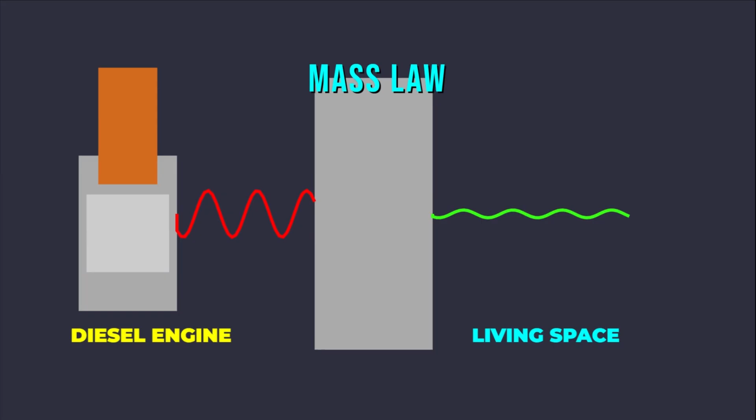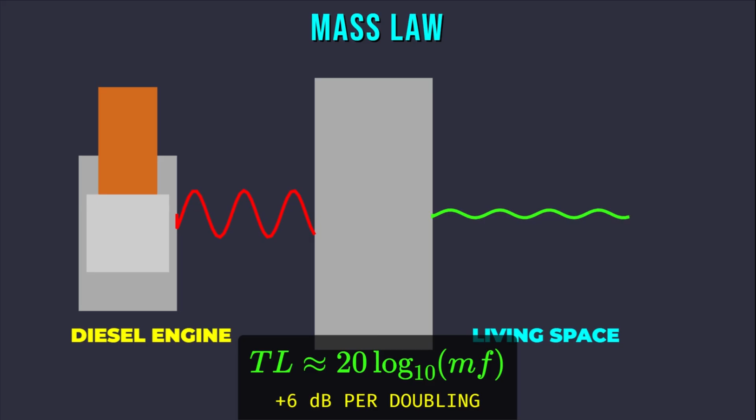A solid concrete slab half a meter thick still allows the deep vibration of a diesel engine to penetrate into a living space. This phenomenon occurs because mass alone follows a logarithmic law of diminishing returns, where doubling the weight of a partition only yields a 6 decibel increase in sound isolation.

In structural acoustics, this is known as the mass law, which dictates that the transmission loss of a single-leaf partition is primarily a function of its surface density and the frequency of the sound. For a home builder, relying solely on heavy materials becomes structurally and economically unfeasible when seeking high levels of quiet.

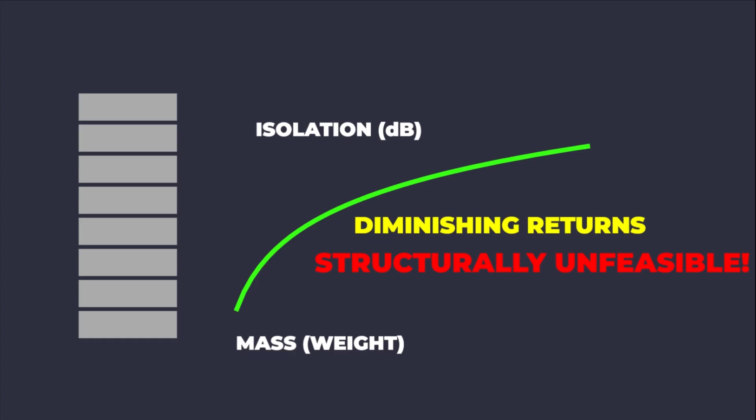Sound energy moves through solid materials as mechanical vibration, traveling at speeds significantly higher than through air. To achieve superior isolation without excessive weight, engineers must look beyond simple density and begin manipulating the mechanical path through which vibration travels. Every rigid material has a specific critical frequency where the speed of its internal bending waves matches the speed of sound waves in the surrounding air.

At this precise point, the material becomes acoustically transparent, allowing sound to pass through with minimal resistance. This is the coincidence effect, and it creates a significant dip in the sound transmission class of a wall. For standard half-inch gypsum board, this critical frequency typically falls in the upper mid-range, which is highly audible to the human ear.

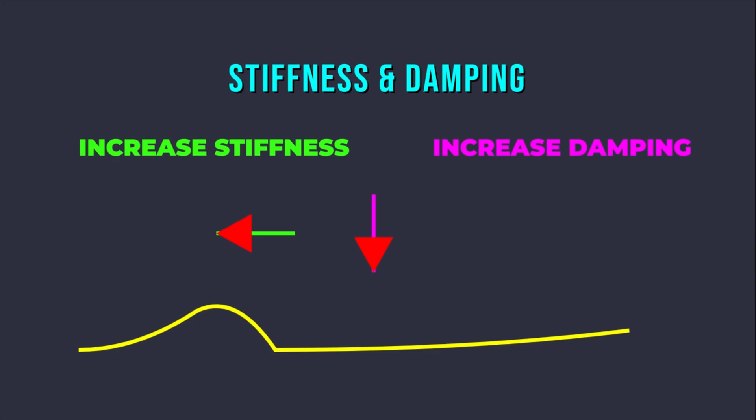Engineers mitigate this by either increasing the stiffness of the material to push the coincidence frequency below the audible range or increasing the damping to flatten the resonance peak. Understanding the relationship between bending stiffness and surface mass allows for the selection of materials that do not exhibit these weaknesses in the frequencies most common to residential noise, like speech or mechanical systems.

In standard light frame construction, studs act as mechanical bridges that transmit vibration directly from one side of the wall to the other. When sound waves hit one face of the drywall, the energy is transferred through the screws into the wood or steel stud and immediately out through the opposite face. This direct connection bypasses any insulation inside the wall cavity, rendering the internal airspace largely ineffective for sound isolation.

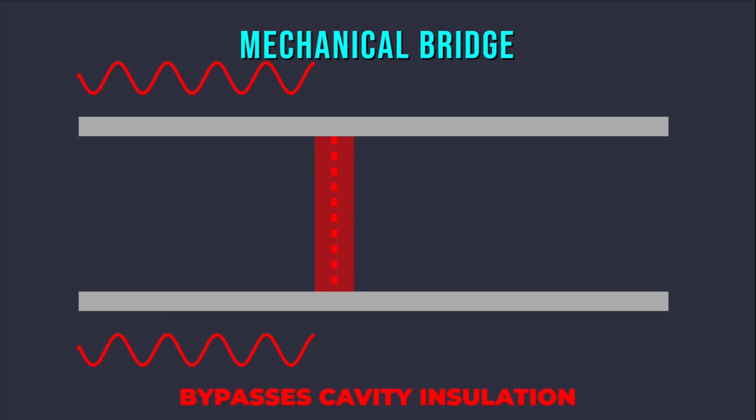Mechanical bridging explains why a wall with high thermal insulation can still perform poorly in acoustic tests. To break this bridge, the two faces of the wall must be physically separated so they can vibrate independently of one another. This separation is the foundation of decoupling, a strategy that shifts the engineering focus from blocking sound with mass to interrupting the transmission of kinetic energy through the structural skeleton of the building.

Staggered stud construction utilizes a wider floor plate than the individual studs to create two independent rows of vertical members. Each row supports only one side of the wall, ensuring that no single stud touches both the interior and exterior wall skins. This design breaks the direct mechanical bridge found in standard framing while maintaining a single wall footprint.

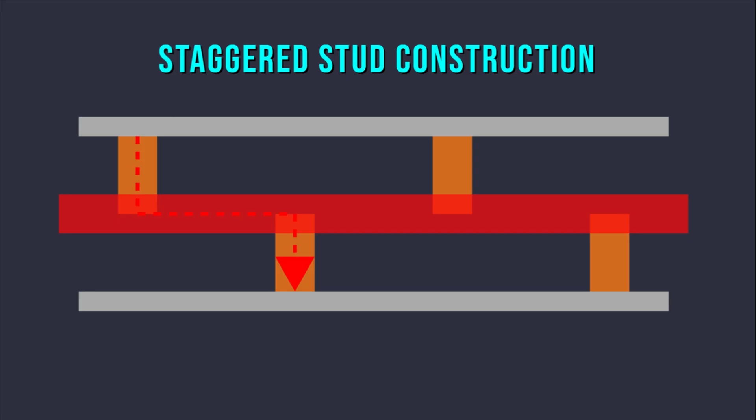While effective at reducing the transmission of high-frequency sounds, staggered stud walls are still limited by their shared top and bottom plates. Since both sets of studs are rigidly attached to the same horizontal members, low-frequency vibrations can still travel through the plates in a phenomenon known as plate flanking. Despite this limitation, staggered studs provide a significant increase in sound transmission class compared to standard framing without requiring the additional square footage of a full double stud wall system.

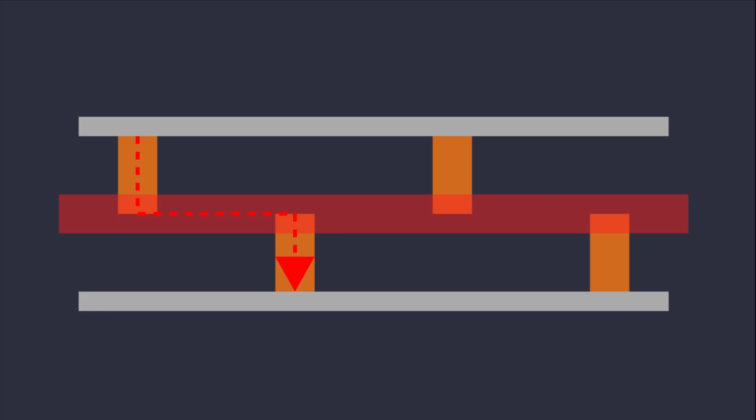The most effective method for structural decoupling is the double stud wall, which consists of two entirely separate framing systems separated by an air gap of at least 25 millimeters. By eliminating shared top and bottom plates, the double stud design provides nearly complete mechanical isolation between the two wall faces.

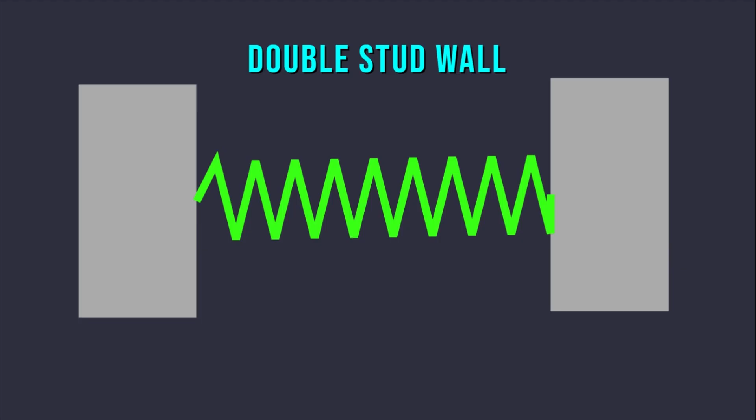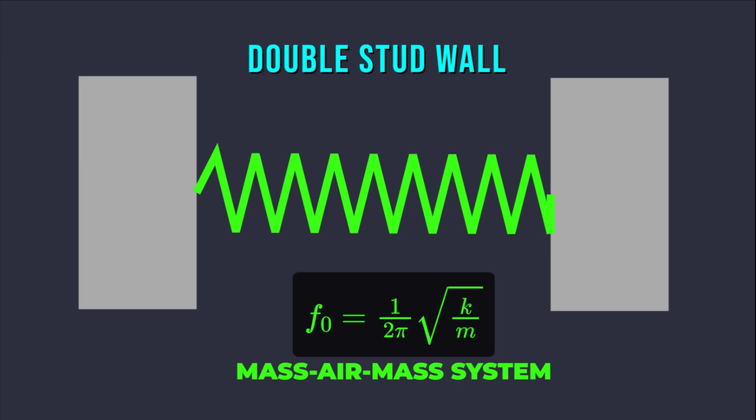This configuration creates a mass-air-mass system where the air in the cavity acts as a soft spring between two heavy masses. The depth of the cavity directly influences the resonant frequency of the system, with larger gaps providing better isolation for low-frequency sounds, like the bass from a home theater or heavy machinery.

Filling the cavity with open-cell insulation, like mineral wool, does not block sound directly, but instead provides acoustic damping by converting the movement of air molecules into heat through friction within the fiber matrix. An isolated wall functions as a mechanical oscillator, where the two layers of drywall represent the masses and the air trapped between them represents the spring.

The resonant frequency of this system is a critical design parameter because the wall actually loses isolation performance at its own natural frequency. If the resonance occurs at 60 Hz, the wall will vibrate sympathetically with low-frequency noise, potentially performing worse than a single layer of material.

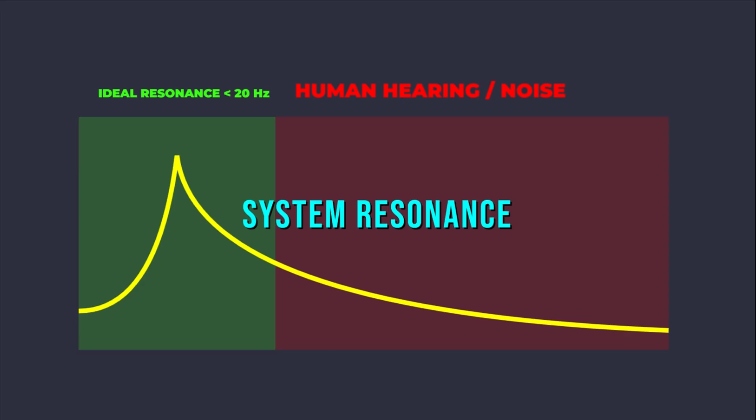To prevent this, engineers maximize the air cavity depth and the mass of the wall leaves to push the resonant frequency as low as possible, ideally below 20 Hz. This keeps the resonant peak outside the range of human hearing and typical building noise.

Precise calculation of this frequency is essential for infrastructure near rail lines or airports, where low-frequency energy is the primary acoustic challenge in civil engineering projects.

When space constraints prevent the use of double-stud walls, resilient sound isolation clips offer a high-performance alternative for decoupling. These devices consist of a rubber isolator mounted to the stud, which holds a metal hat channel in place. The drywall is then attached only to the channel, never directly to the studs.

The rubber element acts as a shock absorber, significantly reducing the amount of vibrational energy that can pass into the structure. Unlike older technologies such as resilient channels, which are easily short-circuited by long screws hitting the studs, clips are more robust and less prone to installation errors.

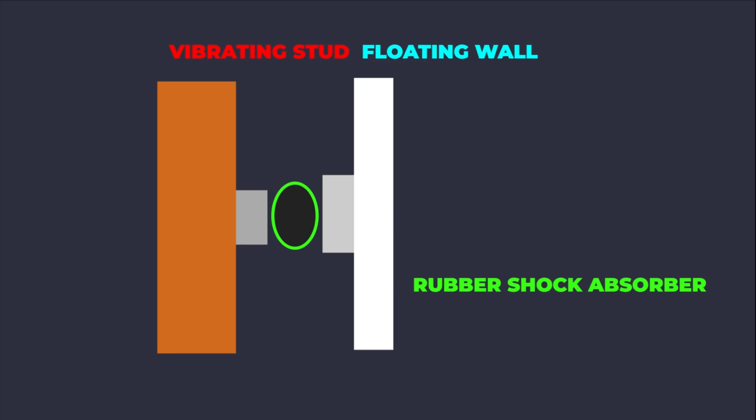By creating a floating wall surface, these clips allow for high sound transmission class ratings in high-rise developments and multifamily housing, where floor space is at a premium and structural integrity must be maintained through rigid framing.

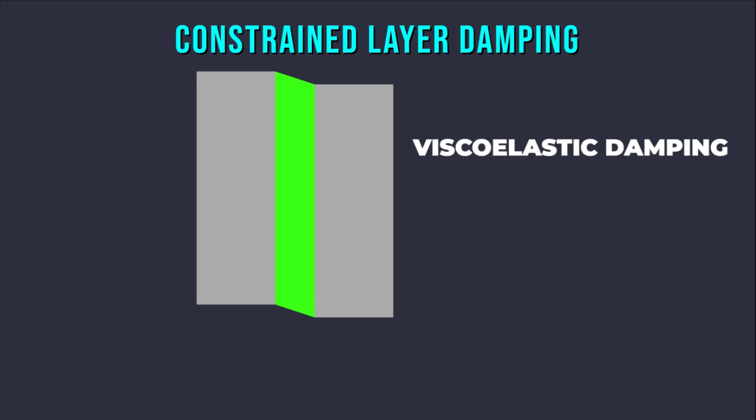Damping is the process of extracting energy from a vibrating system to stop it from ringing. In modern wall construction, this is achieved using viscoelastic damping compounds applied between two layers of rigid gypsum board. When sound waves cause the wall to flex, the damping layer is subjected to shear forces. Because the material is viscoelastic, it resists the shear and converts the mechanical energy into a negligible amount of heat.

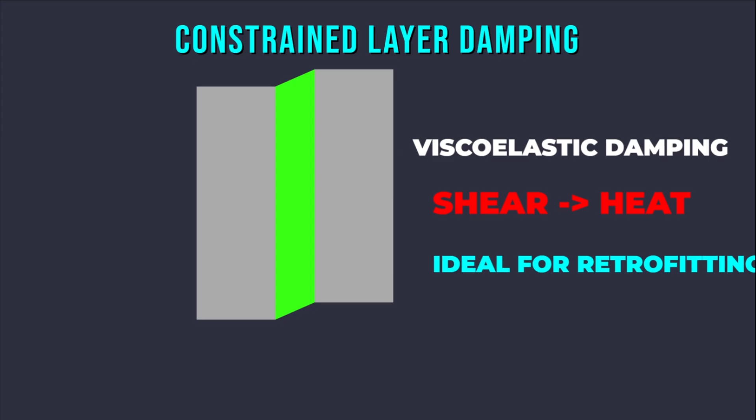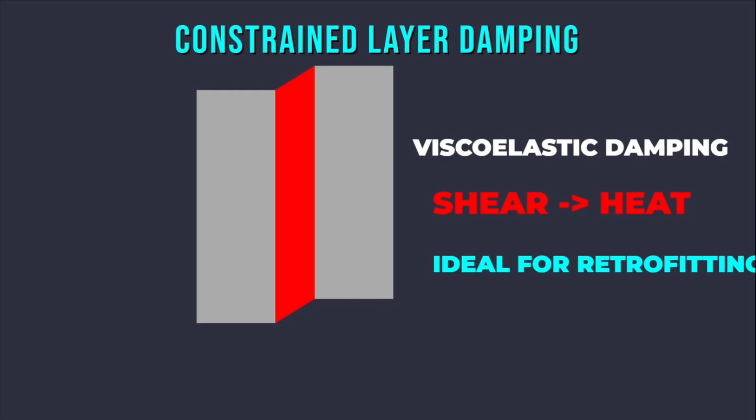This process is known as constrained layer damping. It effectively reduces the amplitude of the coincidence dip and lowers the overall vibration of the wall leaf. Using a damping compound allows a partition to achieve the acoustic performance of much thicker or heavier materials. This technology is particularly useful for retrofitting existing structures where the framing cannot be altered, but improved sound isolation is required for office privacy or media rooms.

A common mistake in acoustic design is the creation of a triple leaf system, which occurs when a third layer of mass is placed inside a cavity between two existing walls. Physics dictates that two air cavities are worse than one large one. This happens because the air in the smaller cavities is stiffer, which significantly raises the resonant frequency of the wall system.

A wall that would have isolated deep bass effectively as a double leaf system often fails to do so when a third layer is added in the middle. The resulting resonance often falls directly in the range of the human voice, leading to a noticeable decrease in privacy between rooms. Successful sound isolation requires maintaining a single, large airspace between two decoupled masses.

Avoiding the triple leaf effect is a primary rule for engineers designing high-performance partitions in music studios and luxury residential buildings.

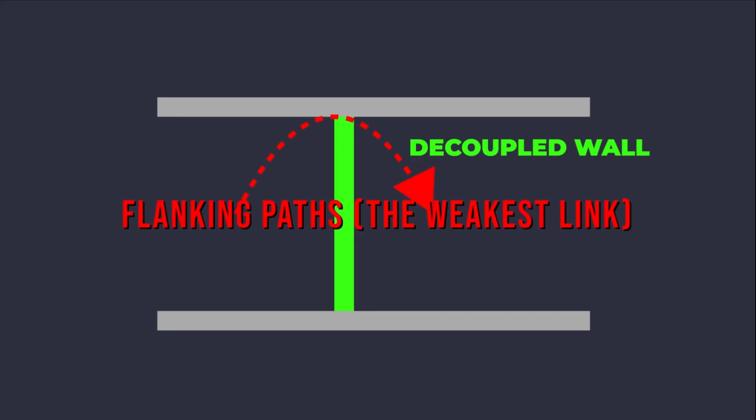Sound isolation is only as strong as its weakest link, a concept known as the flanking path. Even a perfectly decoupled wall will fail if sound can travel around it through shared floor joists, ceiling plenums, or electrical outlets. In civil engineering, flanking through the structure is a major cause of noise complaints in concrete buildings, where the floor slab acts as a continuous transmitter of impact and airborne sound.

To prevent flanking, engineers must use acoustic sealants at all joints and ensure that decoupling extends to the entire room envelope, including the ceiling and floor. Small gaps or penetrations for pipes and wires can reduce a wall's performance by as much as 15 decibels. Using heavy putty pads on electrical boxes and flexible connectors for HVAC ducting are necessary steps to ensure the theoretical performance of a decoupled wall is achieved in the field.

The sound transmission class, or STC, is the standard metric used to rate the effectiveness of interior partitions. It is derived by measuring transmission loss across 16 standard frequencies from 125 Hz to 4000 Hz and comparing the results to a standard curve. However, building professionals must be aware that STC does not account for low-frequency noise below 125 Hz, which is common in modern urban environments. For projects near heavy transport or those involving subwoofers, the outdoor-indoor transmission class, or a full octave band analysis, is required.

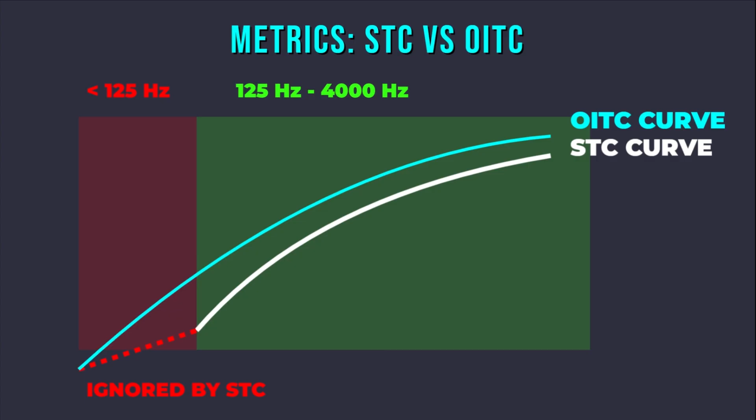Laboratory tests provide a baseline, but the apparent sound transmission class, measured in the actual building, accounts for the realities of construction quality and flanking. Understanding these metrics allows for the objective evaluation of decoupling technologies and ensures that the finished structure meets the specific acoustic requirements of its occupants.

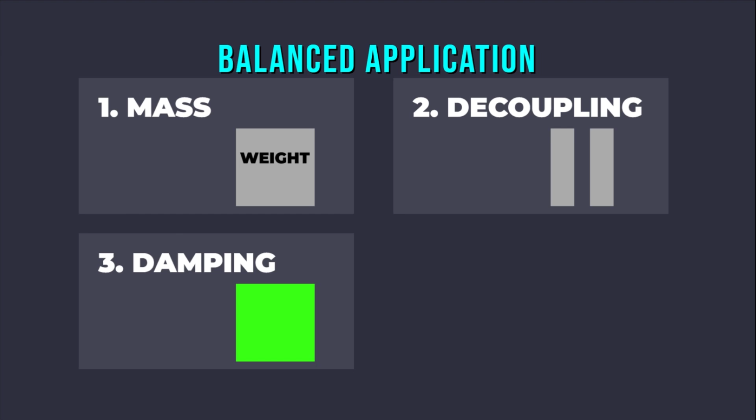Effective sound isolation in modern civil engineering requires a balanced application of mass, decoupling, damping, and the elimination of flanking paths. We have seen that mass law provides the foundation, but mechanical separation through double studs or resilient clips provides the most significant gains in decibel reduction. Controlling the resonant frequency of the mass-air-mass system prevents the wall from becoming a radiator for low-frequency noise, while damping compounds mitigate the coincidence effect in the mid-frequencies.

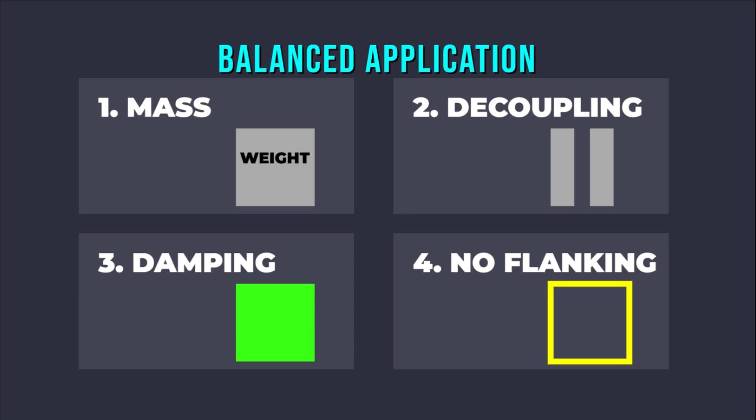Each of these components must be integrated into a sealed system to prevent air leaks from compromising the structure. By applying these physical principles, builders can create environments that remain quiet and functional despite the increasing density of our urban infrastructure. The science of decoupling is not about adding more material, but about intelligently managing the energy that moves through the spaces we inhabit.